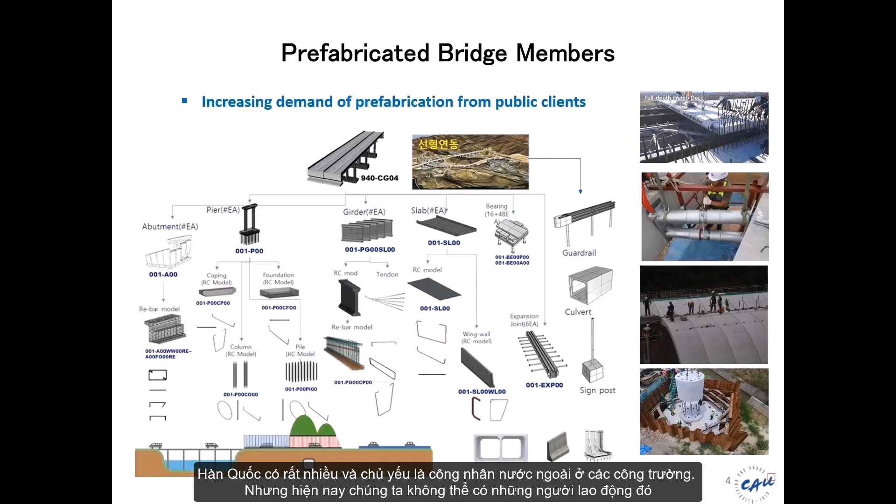So we need to digitalize the data of geometry change from design dimensions. And also the public clients recently have increasing demand for prefabrication for every construction project. It's obviously because of the COVID situation. In Korea, there are mostly foreign workers on construction sites, but nowadays we cannot have such foreign workers. So this is the background of this research program.

In this program, we want to improve the current situation of BIM in the construction industry. We want to have data-driven communication, because we need to collaborate with other industries, like the manufacturing industry or ICT industry. Of course, we need to use our accumulated domain knowledge data. So digital engineering model means we'd like to have data-driven design for manufacturing and assembly, and even for maintenance.

In this research program, we are developing smarter prefabricated members. So we need technology on the digital design system using the digital engineering model. The digital engineering model supports digital fabrication and quality control, and the members even have a self-sensing function. So we need a digital twin model for lifecycle service.

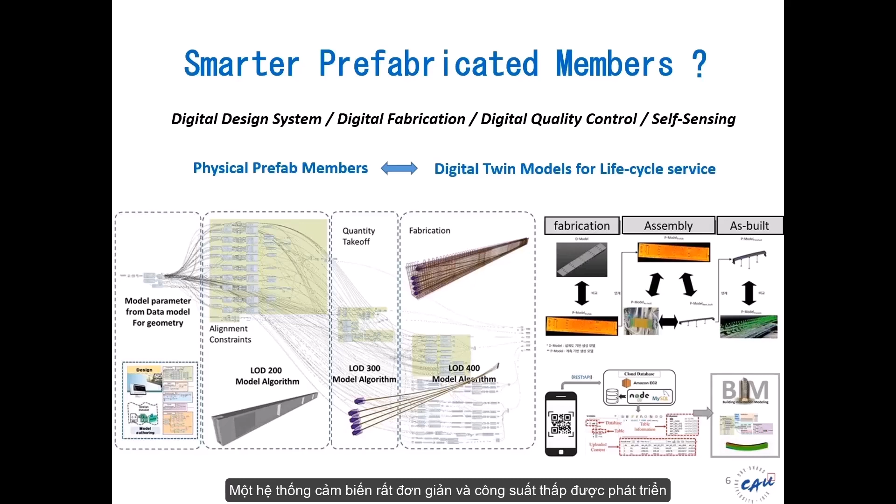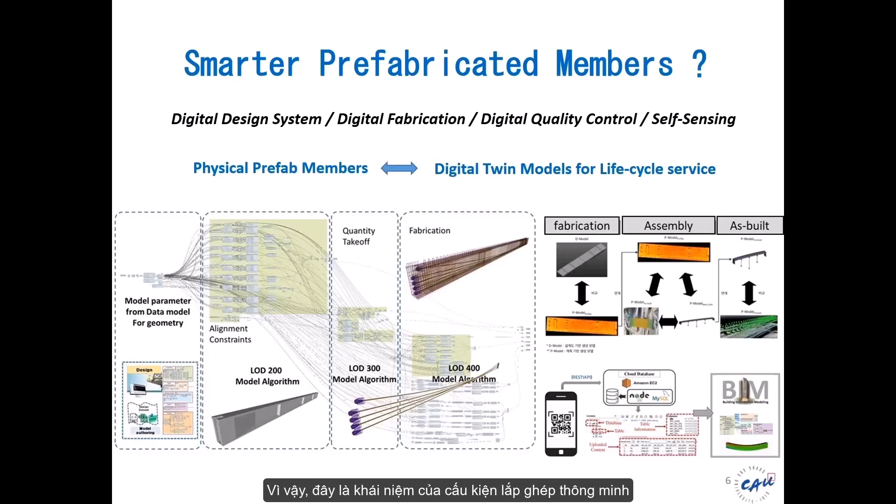And the model is linked to the performance model. Performance needs to be updated continuously because when you have pre-stressing, we have time-dependent behavior. So a very simple and low power sensor system is developed, and data from the sensors will update the model performance. So this is the concept of smart prefab members.

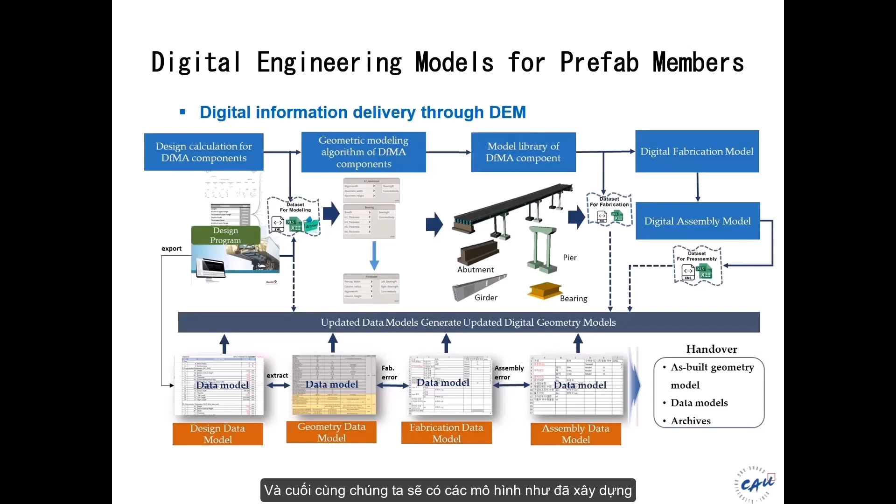If you look at this slide, you can find out how we update every digital model and data from design, fabrication, and assembly. When you update the data, the model follows. I mean, the geometry will be updated together. And finally, we will have an as-built model. So during handover, we will have a digital model and data, and also archives. So this is digital information delivery through the digital engineering models.

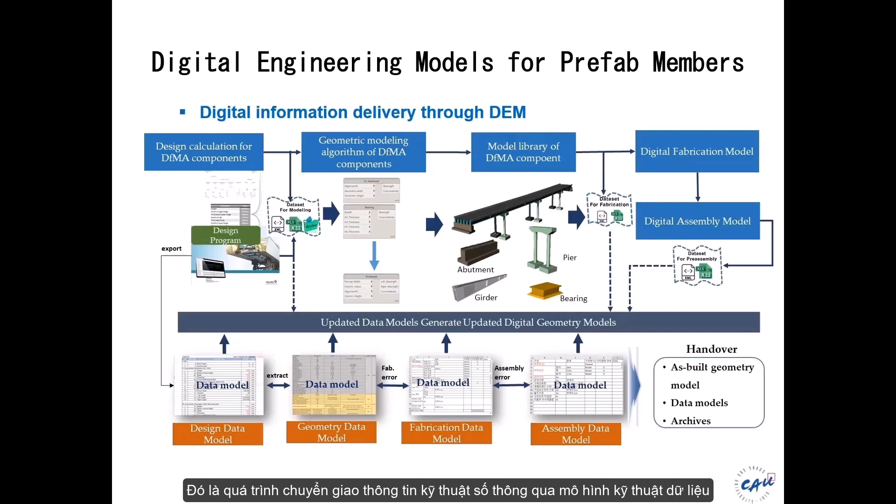So design model, we consider alignments, as you see in this movie. So from the algorithm, we generated design models, and it has a dynamic change of geometry by data from measured dimensions. And it depends on alignment, bridge alignments. So we can generate many different kinds of prefab members.

So it will be embedded in the design system. So a model-driven design system is developing now. As you see here, we have alignments, and the model can be dragged and dropped to the system, and then it fits to the alignments.

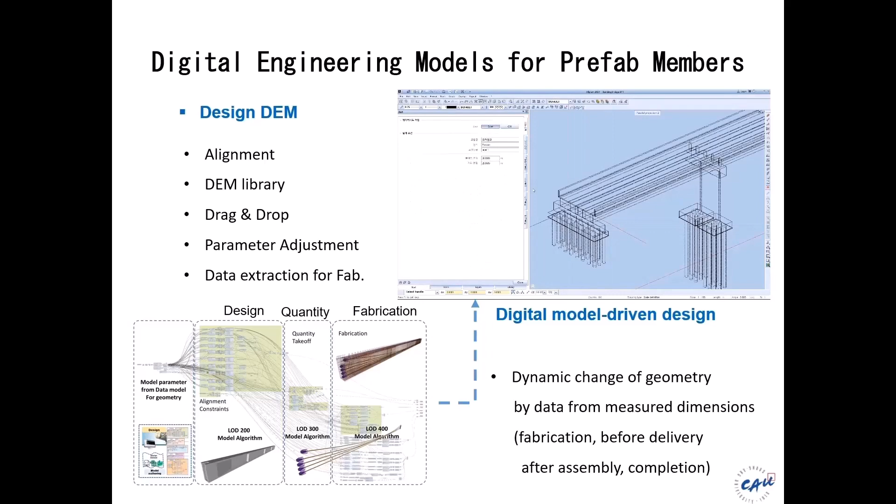Of course, the engineer may have some adjustment of parameters, and when you finish the design, we can extract data for fabrication. I mean the quantity of concrete, reinforcement, pre-stressing steels and some anchorage devices. So this is a design digital engineering model.

Digital model-driven engineering is very interesting because we can connect the model to the digital fabrication technologies, 3D printers and robots. As you see in this movie, we started to create a very aesthetic design, and then it will be realized by 3D printing and also carving by robot arms.

So the data will be extracted from the geometry model for fabrication, and we need to add more data for this kind of digital fabrication, like mix design, nozzle size, speed of movement, and path. So typically we can describe it as G-code. So prefab members fabricated by this process will have additional data for the digital fabrication.

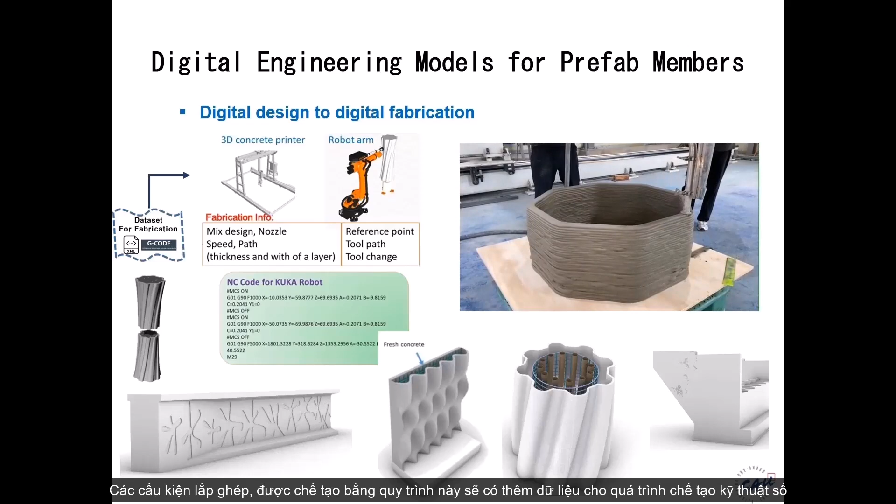So one of our research teams is developing this automated fabrication factory. Among many different equipments, they focus on developing the system mold, distributor, finisher, and curing chamber. And all the equipments import the data from the digital engineering models.

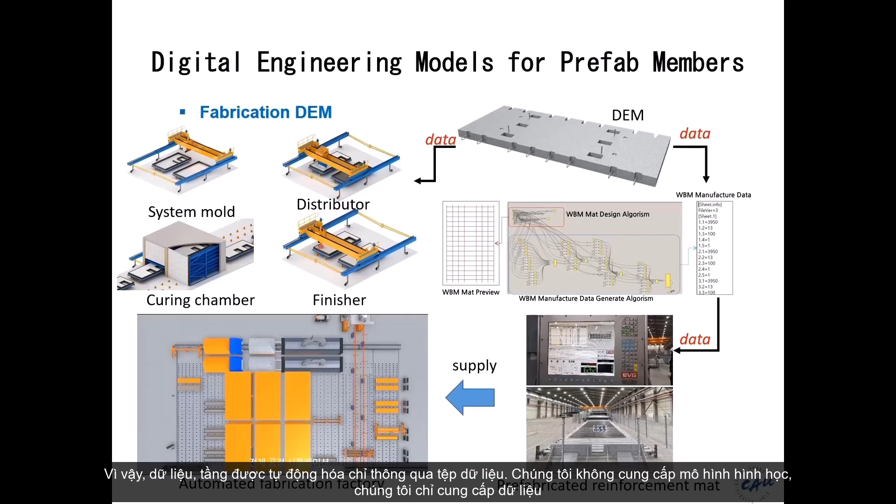And another company, for the prefab reinforcing bars, has equipment that can import data from the digital engineering models. So the data flow is automated through only the data file. We don't provide the geometry models. We only provide the data.

Of course, after accumulation of data from design, fabrication, and assembly, it will be used for maintenance. And during the maintenance period, it is very important to have an analysis model, and the model needs to be updated from the response of the structure. So we developed a very low power sensor system.

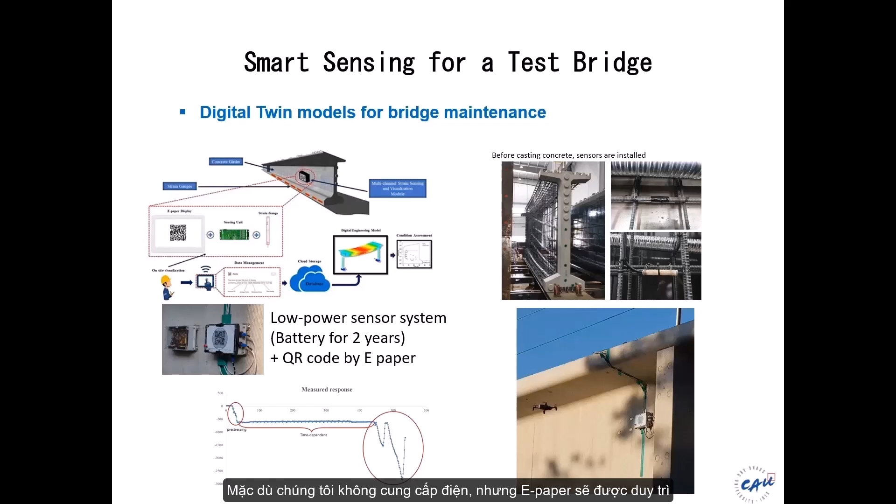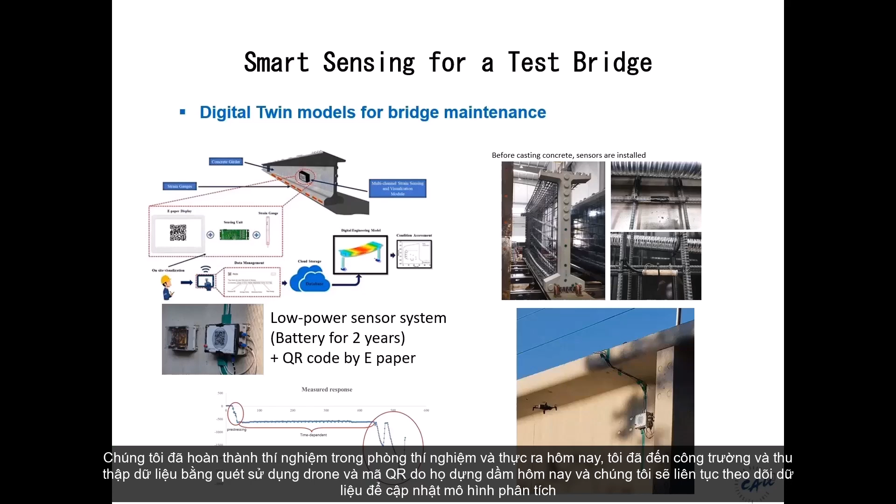We considered the periodic inspection period of 2 years, and the QR code can visualize the data of around 8 sensors by e-paper. Even though we do not have any electricity, the e-paper will be maintained. So we finished the laboratory test, and actually today I visited the site and collected data by drone scanning of the QR code, because they erected the girder today, and we will continuously monitor the data to update the analysis model.

So I just introduced the early phase of our research program. We found that data-driven engineering communication is very efficient for prefabricated bridge members. Of course, we need agreement on how we define the data model and data between suppliers and even assemblers. Through this data engineering model, we can accumulate data, and it can be used for maintenance, and also we can improve the design. Designers will have more data, and they can improve their own design outcomes.

And hopefully we have some new service model for digital SOC, including maintenance. Prefab suppliers may have such a new service model. And this research program will have a next phase of technology implementation for another 4 years.